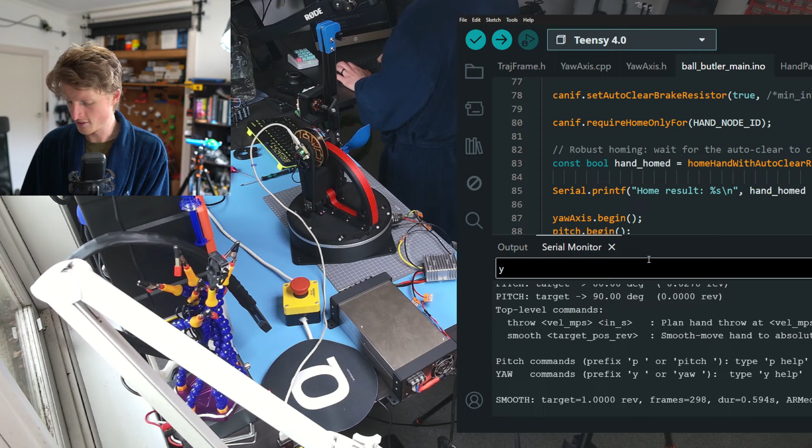Definitely the theme of the day, it works mostly. All right, so then the last axis is the throw axis. We can do some smooth moves and go to a certain position. Let me actually... you can't see this very well, so I'm gonna spin the yaw axis around. Let's go by like -100 maybe. There you go, how good's that? And let's zoom in a bit as well, because we don't need the camera so far out.

Nebby says, been a while since I've been able to watch, great to see it's accurate with the throw. That's awesome, yeah it is. It's very repeatable, except for the pitch axis taking its time to zero in. It seems to be very repeatable. Yeah, I've got a lot of stuff to say about that.

But yeah, so we can smooth move, and we can go between like the... why did that not move?

Rejected. Oh, because our limit, it's too big. It's going up to 8.

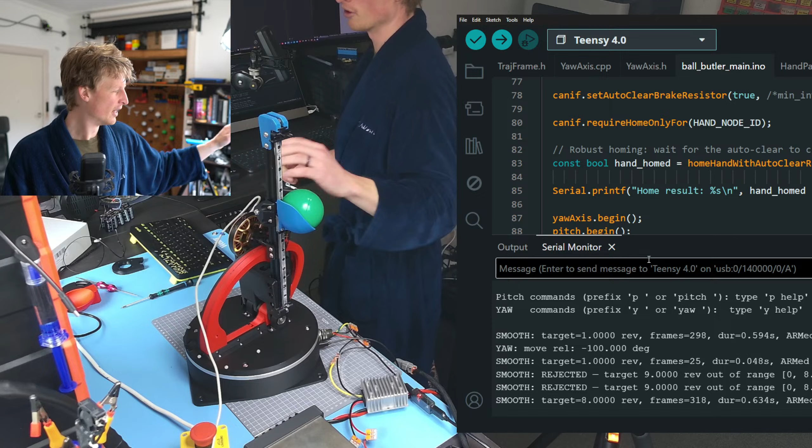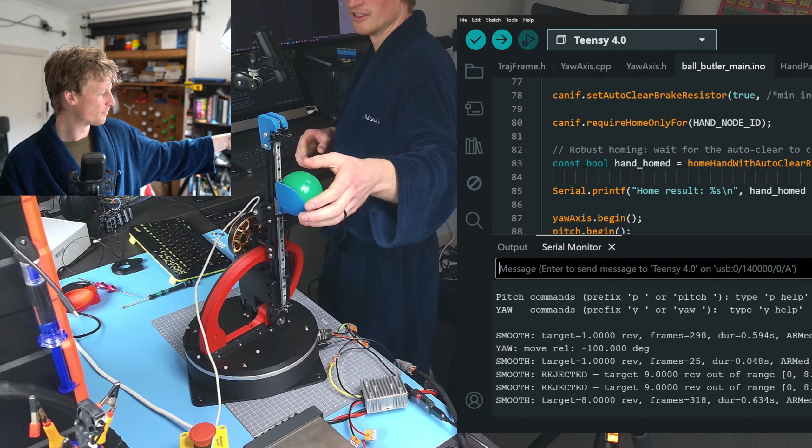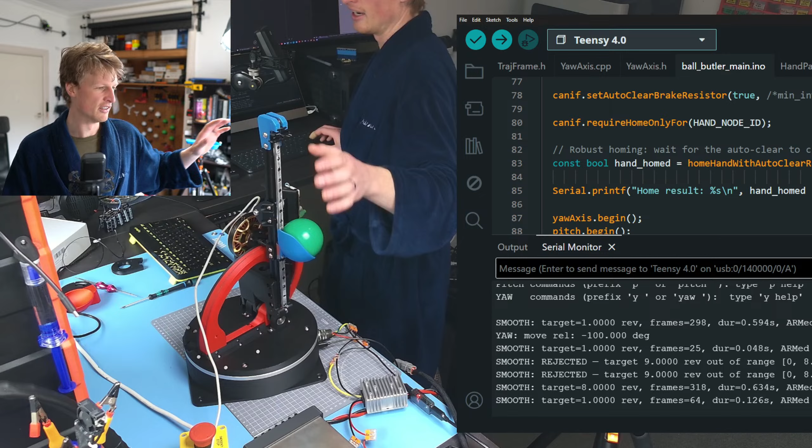Something I quite like about this, I don't know exactly why, but you may recall earlier I mentioned I'm trying to get the hand system smooth enough that I can just tap the ball and it will glide down to the bottom. I don't know if it's because we have an extra pulley in here compared to the Jugglebot system, I'll show you the CAD in a bit. I don't know if it's because of that extra pulley or what, but there is a bit more friction in here, and that works in our favor, because it means I can command the hand to move, and as soon as it's done moving, it turns itself off.

So we can do the smooth moves, and then we can also do throwing. I haven't pushed this too far, and I don't really want to...

We'll see how we go. But I can send a throw. When I send a throw, I say the speed I want to throw at. I don't know how accurate this is to reality. If I command 1 meter per second, I don't think it's actually throwing at 1 meter per second. But then the throw, yeah.

I need to do some more calibration on this as well. So I set the speed, and then the time away from right now when we want that throw to happen. So it goes down, 1 meter per second throw, not very interesting.

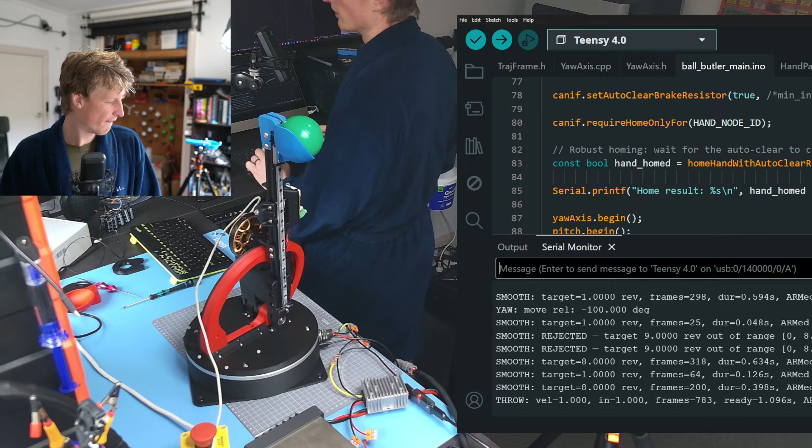Theodore asks, is the encoder output of the pitch axis also noisy? No, it's not. Short story, from what I can tell, it's not - to 2 or 3 decimal places, it's not. It's actually quite clean.

So let's go up, let's go to 2 meters per second. What? Ah, okay, 1 second is too soon. We need at least 1.245 seconds.

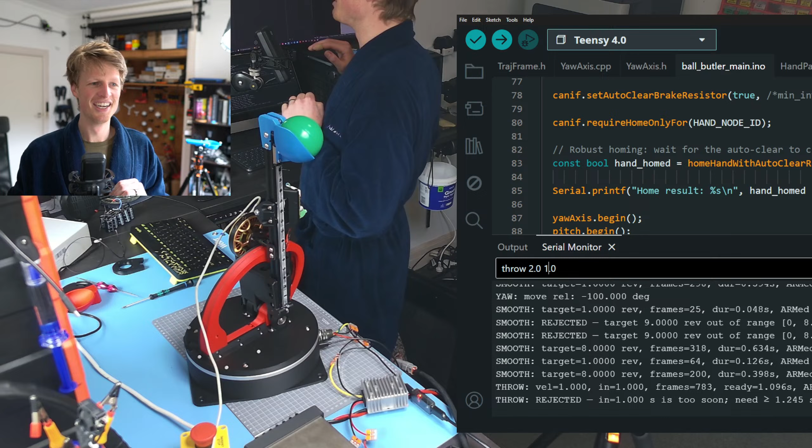Because right now I have it set up so that when it goes down, it calculates how much time it will take to move down to the very bottom in a slow manner. Then it pauses at the bottom for some amount of time, and then makes the throw. If there's not enough time - if I've commanded a throw to happen in 1 second, as I just did, but it's going to take 1.2 seconds to be fully ready by going down and waiting - then it says no, I can't do it. You need to give me more time.

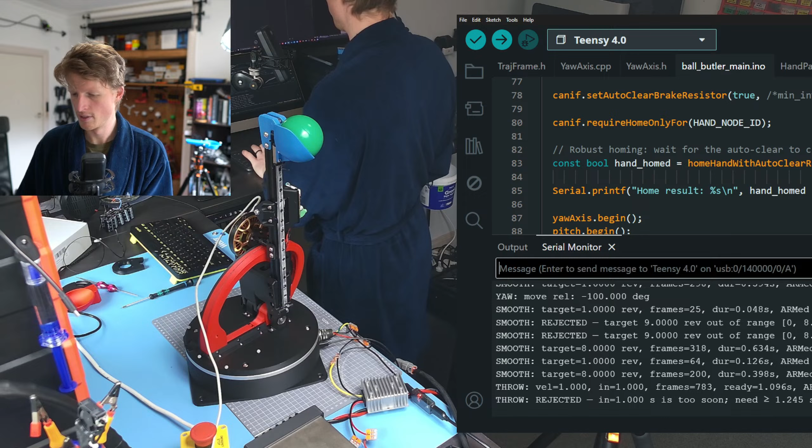So let's give it a bit more time. Now it goes down. And of course, Ball Butler is not designed to catch, so this makes the testing a little bit annoying because I have to manually catch the ball every time.

Let's go a bit faster. Let's go to 3, and let's maybe zoom out a bit.

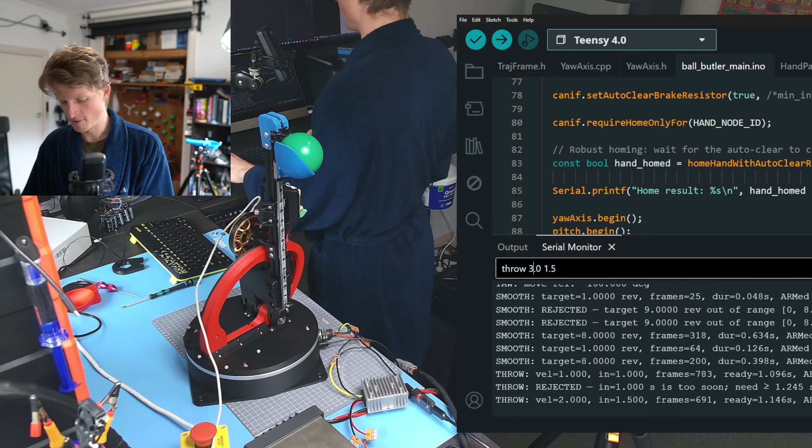Yes, James, that's a very good way to say it - it's neutrally buoyant on the linear bearing. Absolutely, yeah, it's very easy to move around. You can see it doesn't take much force, but then when you stop moving it, it just sits there. Which is kind of nice, but it also means the motor's working harder than I maybe want it to.

But also, it can do big throws. So it's 3 - that's all right, we're getting there. I don't think I've tried 4 before. So let's... that's pretty good.

I think that might have been out of frame. And of course, this is the same everything pretty much that Ball Butler is using, so it's very, very capable.

Let's try 5, and then I'm not going to push it past that, because I've definitely never gone this far before. That hit the roof, and we got an error. What was our error? This is good science, because I haven't done this before.

Alright, okay, I was going to talk about this a bit later, but maybe now is a good time. Just keep this in mind: the ODrive S1, you can't actually see that. Let me spin it around so you can get a better look.

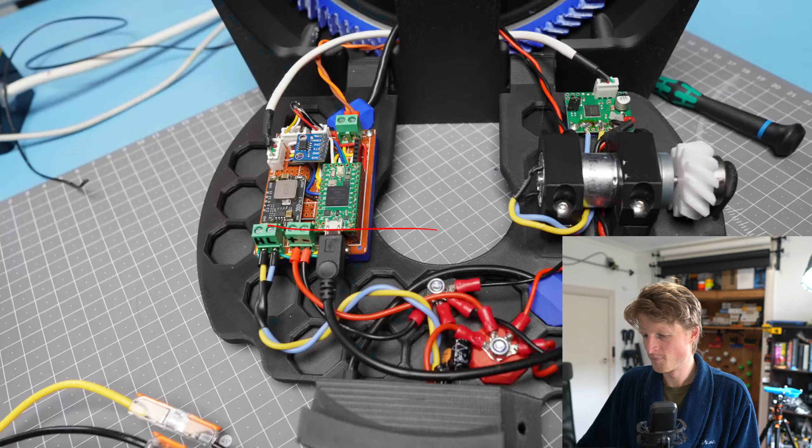I've got a collection of photos here now that I wanted to show at some point, and I didn't really have a good spot to do it, so I figured I'll just do them all at once. This is the inside of Butler, and I might show a bit later, once I know I'm done with all the demos, I can take it out and show you if we want to. It was an interesting experience getting these cables around the back here. If you don't remember this, I'll show you on the CAD.

This base, I've designed it so that it can open up so I can get access to all of these electronics fairly easily. All I need to do is unscrew a single screw in here, and then once that screw's done, I can flip this down. Of course, these connectors do come with the lid here, but because of the way I've modeled this in Onshape, it's kind of hard for me to make them move without breaking other things, so they stay there in the CAD.

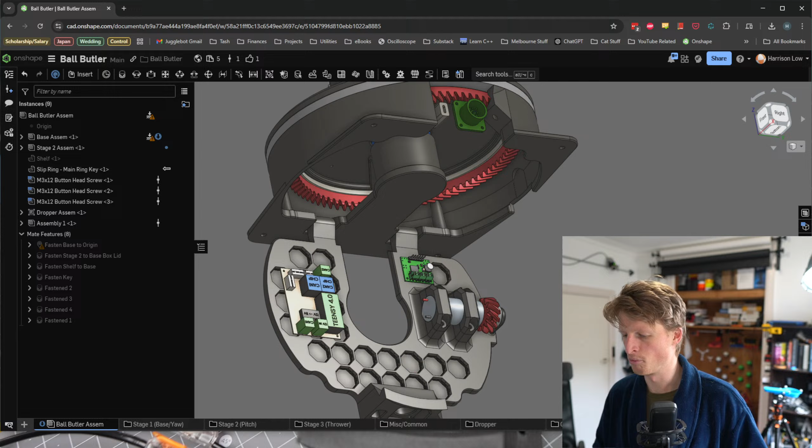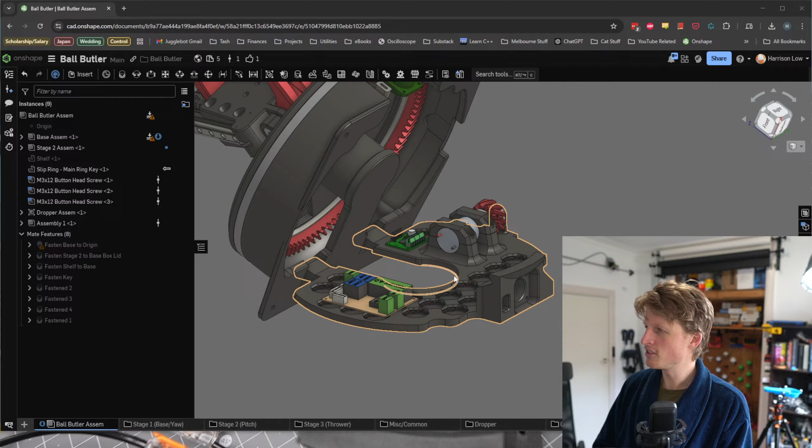There are cables that need to run from this blue guy in here, you can see that little thing here. These cables need to run out from there and then go down into the Teensy board over here. Getting those to be the right length so they didn't pinch or get pulled too tight when it's fully open was a little bit tricky, but honestly a lot of the lengths were exact.

These are the same cables that I used before. Like this white one is the exact same cable that I used in the exact same spot before, and it just happened to be the perfect length. So that was very nice, very happy with that. I don't really have too much else to say about this. Yeah, it worked just as well as I hoped it would have.

I really love this. I strongly recommend, if you are doing anything like this where you need to have electronics in a box and you don't know exactly where they're going to be placed and you want a bit of freedom with where to put things, this multi-board layout that I've done here, and you can see it a bit better in the CAD, these little tiles in here were amazing. It just makes it so easy to snap down little holding things wherever you want. Because I had the cables at certain lengths, I had to actually move where my bus bar multi-board things are, and that was just trivially easy because it's all multi-board. I can just put them wherever I want. Very, very good. Definitely recommend.

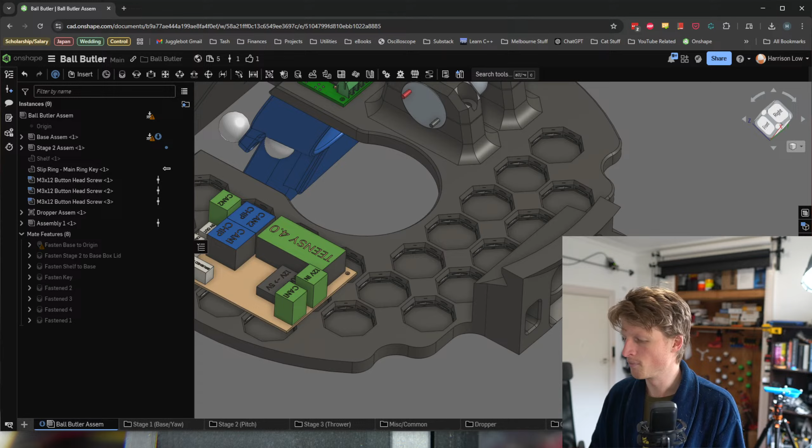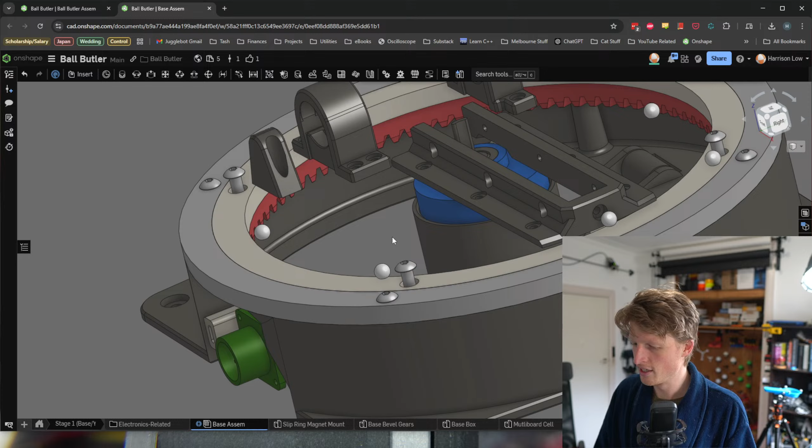That is attached with 4 screws. These 4 screws around here, they go through the lid and into the ring, into the big gear. All 4 of them go in by the same amount, which is, I think, like 7 or 8 mil, something like that, into there.

Actually, we can just measure it, let's not be lazy. Oh, no, it's not, it's 4.5 mil. Maybe this is the problem, that it's not biting in enough. Because in some spots, it's really hard to capture this on camera, but this little gap here is not there the whole way around. So I don't know.

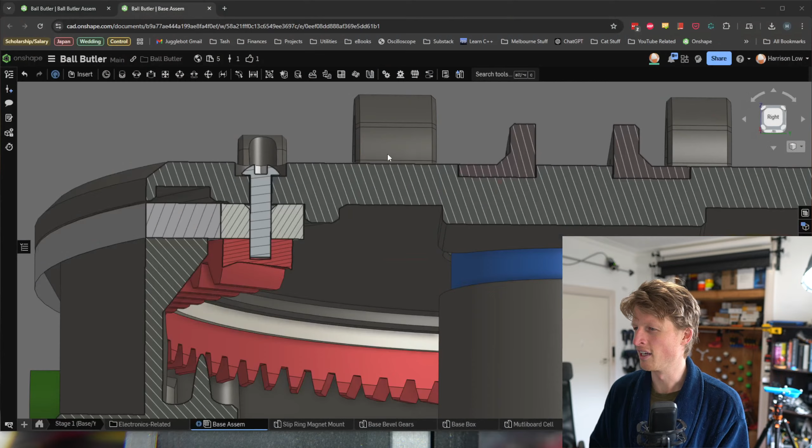I suspect what's happened here is that the print has warped ever so slightly. This is PLA, so it's not usually prone to warping, but maybe it did, or it shrunk a little bit. And because the bearing that I've screwed this into is metal and isn't going to flex at all, I think there might be some weird internal forces in the ring. I wonder if it might be better to print the ring off in multiple pieces, so that the collective shrinkage will be a bit less, or I'm not really sure.

But I have noticed that the amount of backlash present, if I manually try to move the yaw axis, in some positions I can get a little bit of wiggle out of it, but in some positions I can't move it at all. So I think there's definitely something weird going on there, but it still works. So we move on.

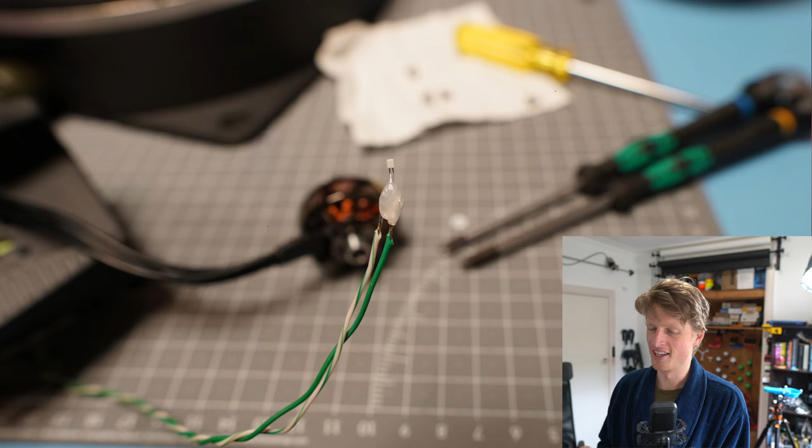I have also added a thermistor into the hand motor because I don't really want to continue burning my hand motors. They are very annoying to re-string into that position. I am aware that because I am pumping a lot of current into the hand motor, it will just be a matter of seconds before the hand motor overheats in some situations.

I think this thermistor will be a little bit too slow to respond if something goes wrong and the hand is just driven into the top and keeps trying to drive into the top, which is the sort of situation that has led to it being burnt out in the past. I don't know if the thermistor will actually be able to do very much to help with that because it's going to take so long to catch up to realize we're actually super hot right now. But it might help.

It might do something. At a minimum, once this system gets working, it's possible we could have it churn through balls pretty quickly, so we can just collect, prepare, throw, collect, prepare, throw. I know I've said in the past I'm not planning on doing this, but it's possible. And maybe it'll be good to at least be able to monitor how that gradual temperature is rising up.

So that's just shoved into the back of the motor. I have added thermal paste as well between the thermistor and the motor coils, so hopefully that should be a fairly accurate representation of the motor temperature once it catches up.

The biggest thing on the Teensy board that I've had to change is the buck converter, because now we're running everything off 24 volts instead of 12 volts. The old converter only goes up to 15 volts, so I had to swap to this one, which goes up to 30-something. It's basically doing the same job. You can see there's a little dab of solder on the 5 volt terminal there.

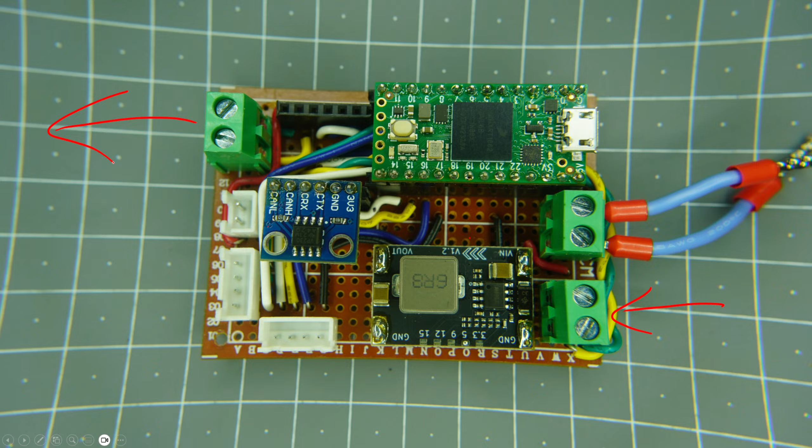Originally I was planning on having CAN coming in from Jugglebot over here, so this would be like Jugglebot CAN, and then we would have CAN coming out over here, internal into Ball Butler. But over the last couple of weeks we realized that for now at least, it's a bit cleaner and easier to just have these two CAN buses merged, so the Jugglebot CAN bus is the exact same as the Ball Butler CAN bus.

To get that to work in the easiest way possible, I just bridged CAN high and CAN low. So like over here, these two CAN high, CAN low, these guys are now just bridged between the two transceivers. That's all I had to do pretty much, and that works.

Yes, some dodgies - there are very many dodgies in this setup right now. This is in no particular order as well, just the order that I happen to remember things in.

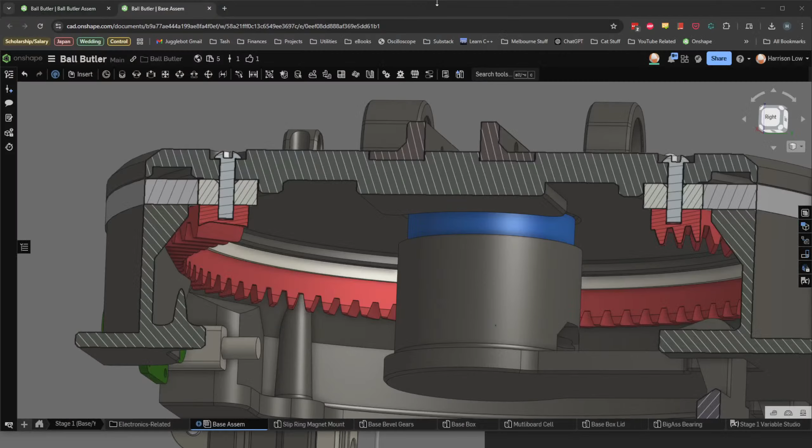The slots in the hand spool end mount, I had to change them - I'll show you in the CAD. This fucking Logitech is really shitting me, I'll probably have a rant about that a bit later.

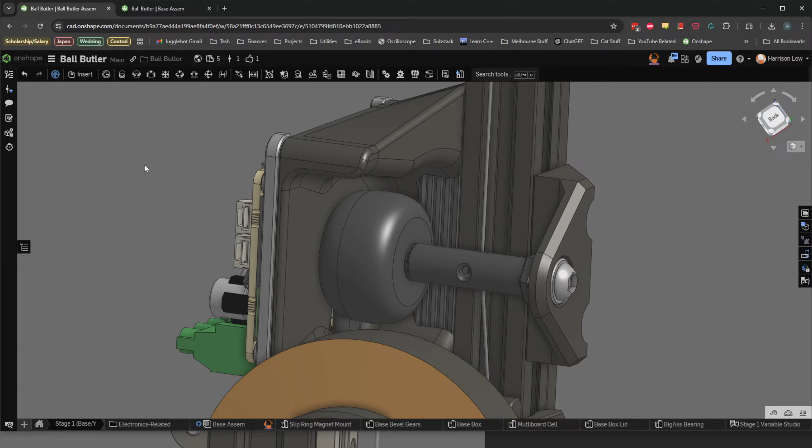So over here we have the hand motor. This is being supported on the back - we've got some screws holding it in, you can see where those 4 holes are. But so that it doesn't cantilever down, we want it supported on this other end as well. In the past when I've done this, I've just had single holes, the CAD has just been correct, essentially the TLDR. The CAD is correct and we don't need to do anything else. So I just make straight up normal holes, and then everything aligns perfectly and it's all nicely, everyone's happy. The motor doesn't have extra drag.

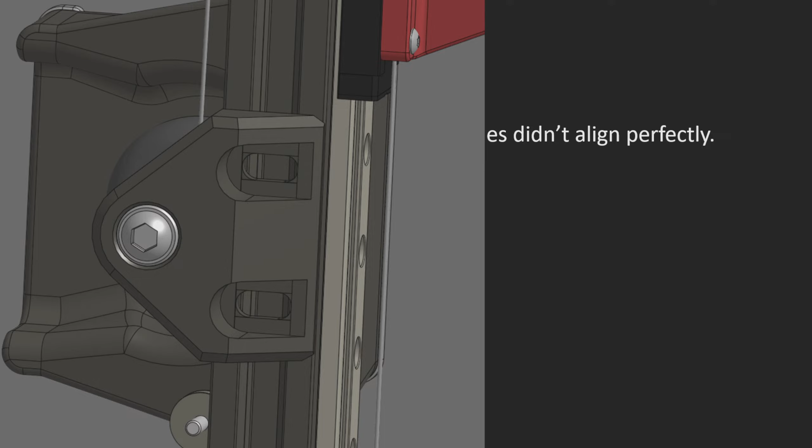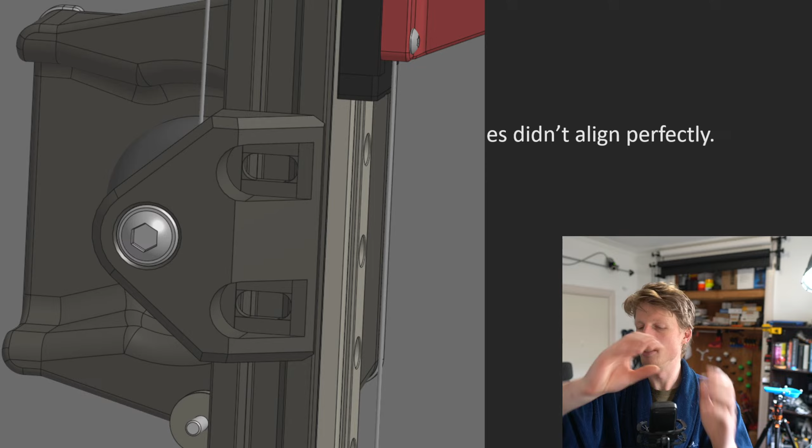But for some reason - I need to get a good video of this, I meant to before the stream, but it is what it is - the hand motor spool is not perfectly true. Basically as the hand motor spins, you can see there's a little bit of wobble in the spool. I'm a little surprised by this because the motor is obviously quite true, otherwise it wouldn't really work. The spool is one of the ones I had made from JLC PCB, one of the aluminium ones, which I actually have one more over here.

One of these guys, this is made of aluminium. I would expect that they would just do this on a lathe, trim it down, and it would be perfectly concentric. But maybe not.

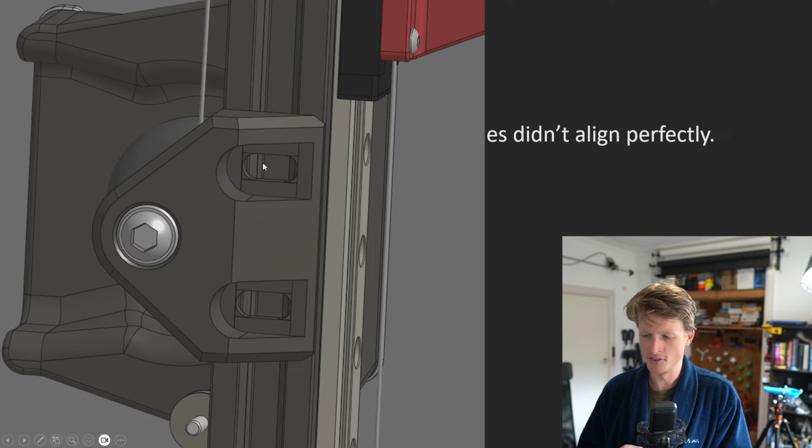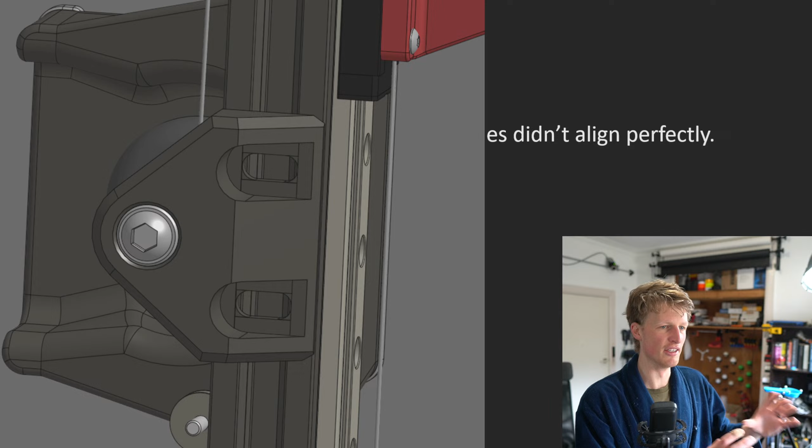So I don't really know what's going on there, but for whatever reason, when I just had the straight up holes, it was not lining up properly, so I had to change these over to slots to get everything positioned correctly. Which I guess isn't too dodgy in and of itself, but I don't love that I had to do that. Anytime the CAD is different to real life, it really makes me a bit nervous, because I'm like, what else am I not seeing that is not correct as well? I just happen to see that this one doesn't match, but what else doesn't match? It's happy days when everything is in agreement.

I also realized over the last couple of days that I don't have a fan inside Ball Butler. This nice big plastic box I've got in here—it's possible that once the yaw motor gets going really fast, that might be putting out some heat, and that heat doesn't really have anywhere to go. I also don't have any temperature sensing elements inside there, so I don't really know if I should be concerned about that or not, but it's a thing that exists. Just kind of foreshadowing in case something goes wrong in the future.

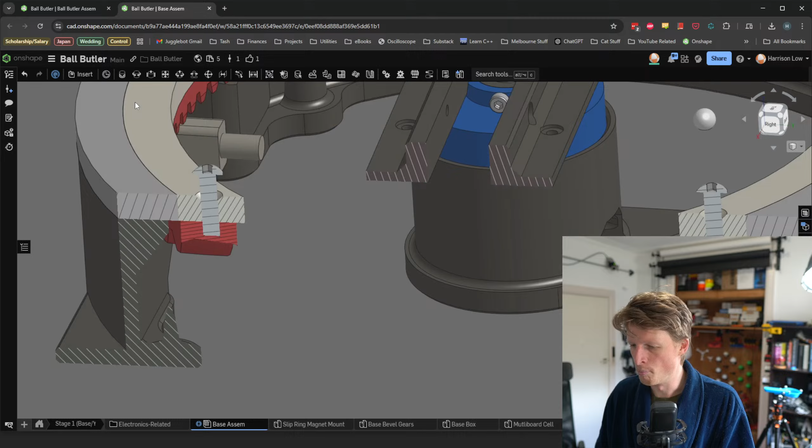Theodore says, about the yaw ring gear, bolts are not the best locating features, even more so if it needs to form its own threads. Yes, which it does. The warp could be from the bolts not allowing the plastic to sit where it wants to. It's tricky though, because I don't know what other features I can use to align them—in the bearing I only have 4 holes. That's it, just 4 holes going straight through, and those are the only things I've got.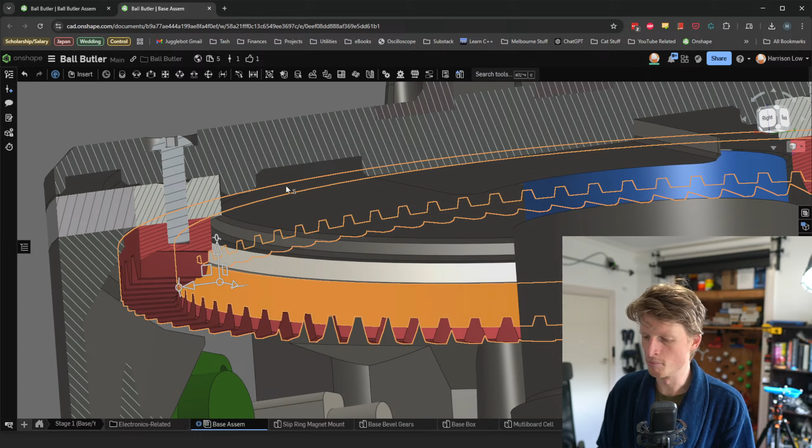And I need the ring to be beneath the bearing. I could have, if I made the ring—I actually saw recently someone made a rotating tabletop thing to take photos of stuff, and I realized what they did was basically make the ring part of the lid. So when I print the lid off, instead of this lip edge I've got, that would be the teeth for the gear. That sort of thing would work—the lid and the ring would just be one solid piece, which maybe would make the warping worse, but maybe not.

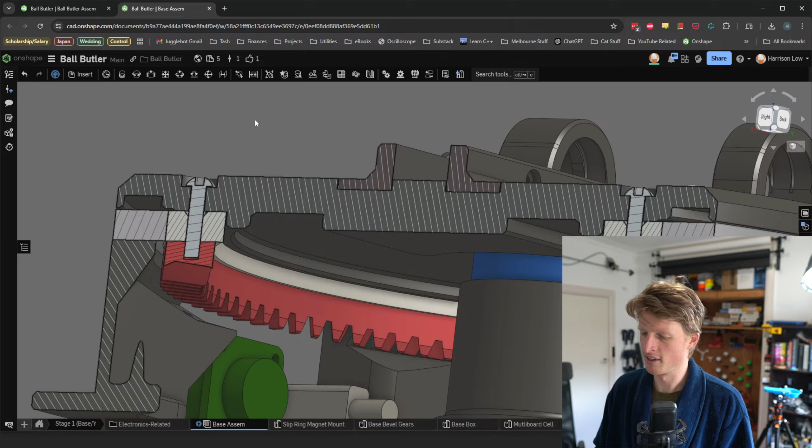It would definitely make the whole thing connected exactly how I want it to be, if I can have no warp. But I don't love that it gets rid of my gear reduction a little bit, and I've already done it this way, so it's not super easy to change. That would definitely require a lot of other things to change. But without doing that, keeping the gear in the position it's in right now, I really don't know how else to locate it. It's a bit tricky.

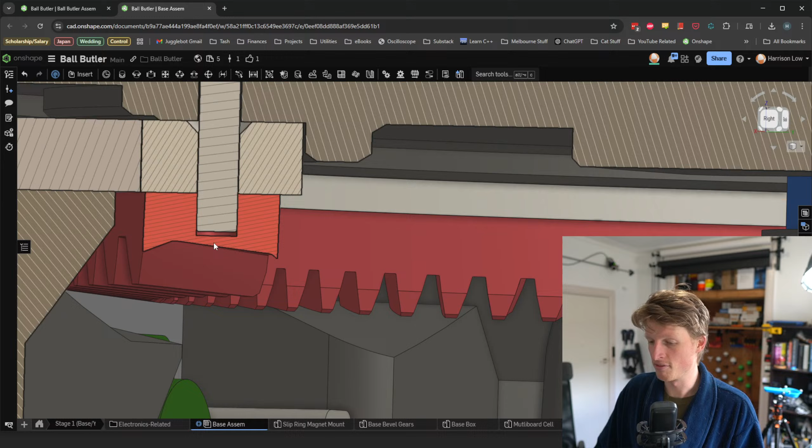Maybe I could make it a bit deeper and have the bolt bite into it a little bit more, but that would require moving the motor down a little bit, which I think would be fine. It's pretty close to the bottom there, but we can trim out a little pocket for it. Yeah, there's some options.

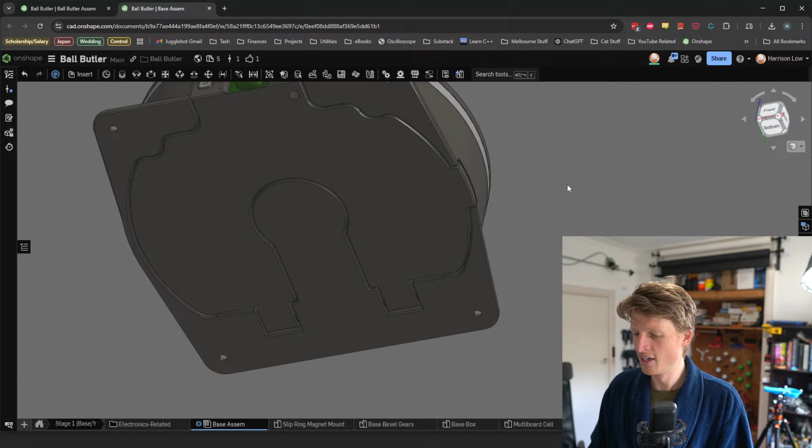And actually, this reminds me—one thing I realized when I first had this in my hands and was playing around with this hinge, which worked perfectly by the way. I meant to check last week's stream to see what I actually showed you, because I've done a lot of hours of Ball Butler work over the last week and can't exactly remember what I had done. So forgive me if I'm repeating stuff.

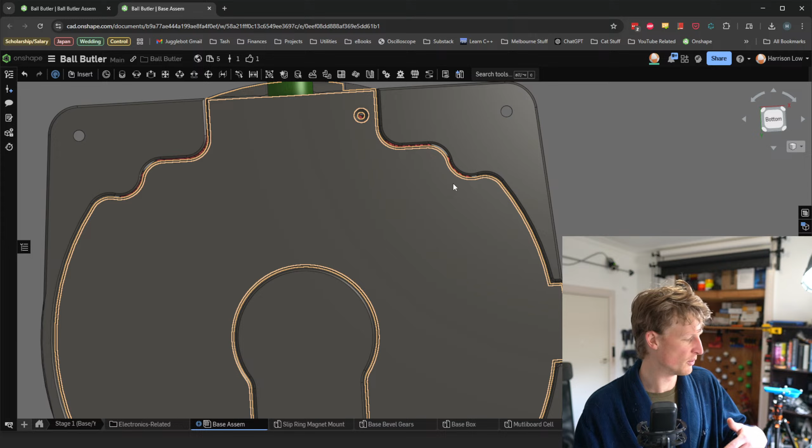But when I had this printed off, I realized that these tolerances in here are way bigger than they need to be. On the actual thing, these are full-on gaps, like big gaps. If this was on the top of Ball Butler for whatever reason, if that same situation was up there, I'd probably be a little concerned about dust getting in. Thankfully this is on the bottom, so it doesn't matter at all that those gaps are quite big.

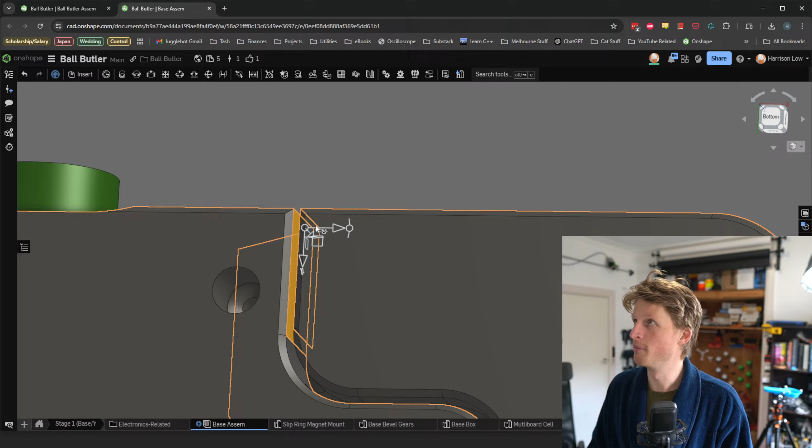But definitely if I was to do this again, I would make those tolerances a bit less. The reason I had the tolerances so big in the first place—there's a 1mm gap the whole way around—is because I really did not want to have to print this off again. Because this whole thing, this guy and this guy, are all one piece. So that was a big print.

I don't love the idea of wasting filament. But one thing that I did that was kind of stupid to do was with the support for the yaw motor over here.

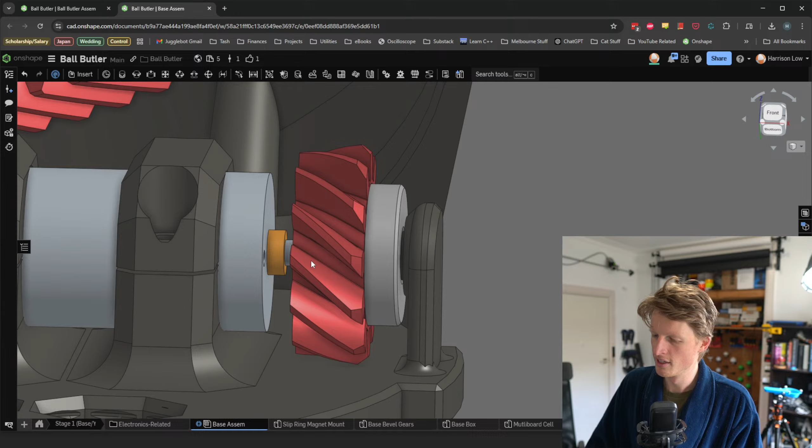I knew I wanted to have a bearing supporting this ring, because as we figured out probably like 6 weeks ago, whenever you have this kind of swept gear where the profile is curving in whichever direction, when you drive that, the gear is going to want to move along the motor shaft.

And to stop that movement from happening, this is also being held in by a grub screw. I've got a T-nut that sits in this square hole here. So a T-nut sits in here, and then a grub screw comes in, and that much more securely locks the gear onto the motor shaft.

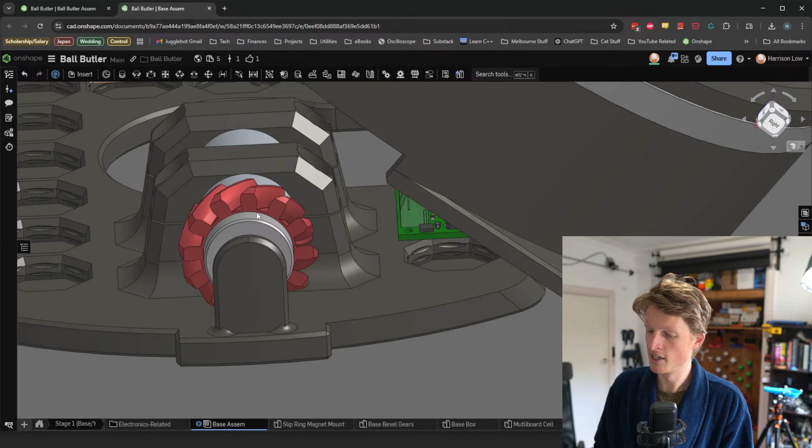However, it's possible that it'll still want to move along the motor shaft, so to stop that from happening we have this bearing in here. I knew I wanted that to be supported, so I made this little supporting thing. But for some reason I wanted it tucked away nicely inside the external box when it's closed up, so that it looks like this.

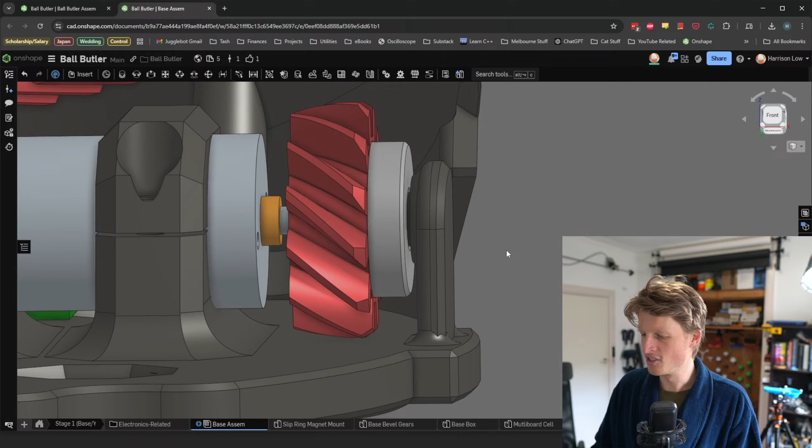But that's stupid, because that means two things happen. One is that this support is now thinner than it otherwise could be. If I extended this support all the way out to this edge, we would have an extra 3 mil of thickness on it. That's pretty significant, and it would make that a lot thicker. As it is right now, it can definitely wobble back and forth a little bit.

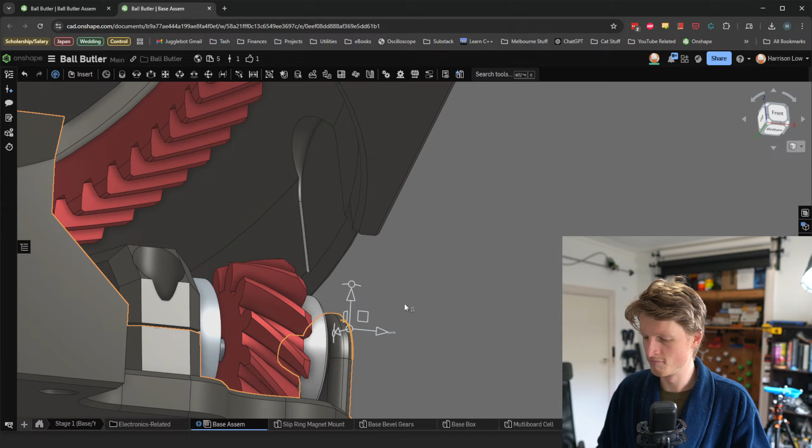The second thing is that I've had to cut out a little cavity in here to fit this feature. And what this means in practice is, because I have so much tolerance in all of this stuff, like even in the hinges, especially in the hinge, I've added quite a bit of gap just to make sure it printed perfectly fine and I didn't get stuck. So because there's so much tolerance everywhere, this whole thing can kind of shift around a little bit.

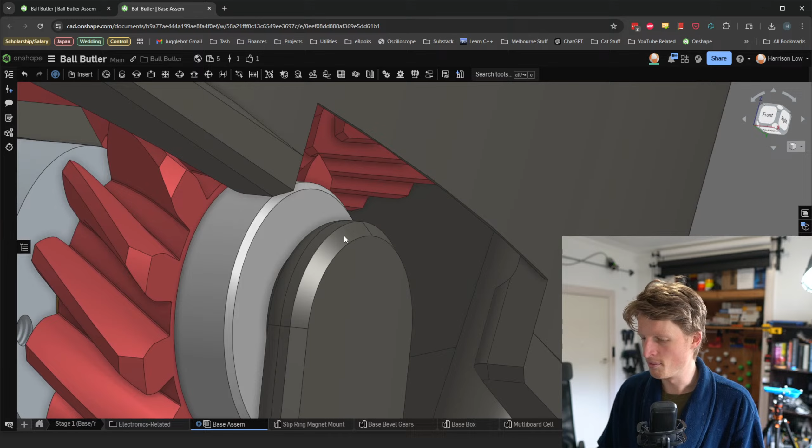And when I close the lid now, what often happens is that this edge will catch on this edge in here, and I have to manually push the whole thing over to the side a little bit to get it to close. That was stupid. I should have just made this continue the whole way out to the edge, and then had the cutout in the main box part be the same as what we have here.

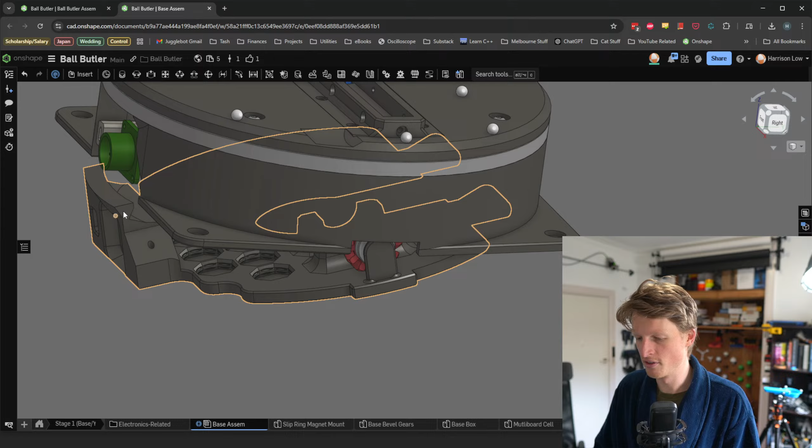Where there's like a full-on cutout and it just slots in. It's a little bit different to this one over here, because this one is on the opposite side of the hinge, so it doesn't have any risk of hitting when it's on a diagonal like this. But I should have done more or less the same thing. This was a silly choice, but it works, so.

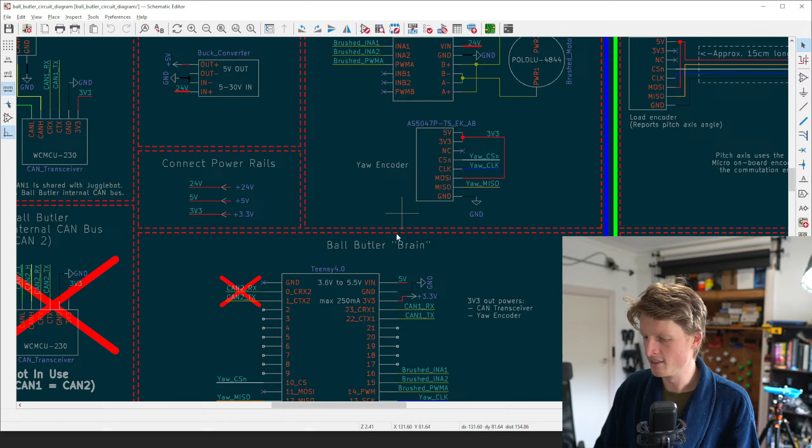All right, another dodgy thing. Now that I think about it, maybe this has something to do with why we're getting noise on the yaw encoder, maybe. But I don't know. So you may recall, I was going through my schematic, which I can show you here. Again, there's a link in the description, if you go to the GitHub repo you can find this schematic.

I was having a look through my schematic a couple weeks ago, looking at pictures I had taken of all the electronics, and I realized that according to my photos, the yaw encoder was being powered by 5 volts. This is bad, this is not good, because this yaw encoder is being fed straight into the Teensy.

So these outputs, yaw CSN, let me go on the highlighted one. Yaw CSN goes to the Teensy. Yaw clock goes to the Teensy. Yaw MISO goes to the Teensy.

Teensies are not capable of supporting a 5 volt signal on any of their pins. My understanding is that if you put 5 volts on any of the Teensy pins, that pin will break and just not be functional anymore. And at minimum, maybe other things will break as well.

So I was like, what the heck is going on here? According to my photos, this encoder is being powered by 5 volts, which I would expect would mean it would be sending out 5 volts. But somehow it worked. So I assumed maybe my photo was not up to date and I had actually just wired it to 3.3 volts. But it turns out it actually was powered by 5 volts.

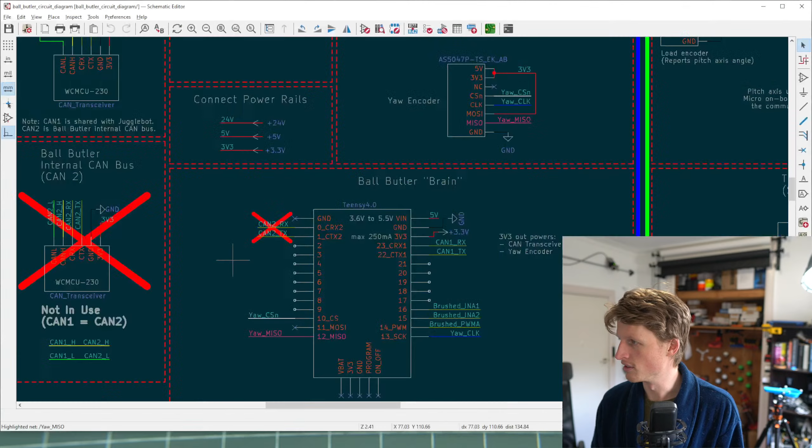I legitimately do not understand how this didn't break. The only explanation I can think of is that whoever designed this breakout board, this prototype board for the encoder, must have just figured, you know what, someone is going to mess up and power this by the wrong voltage, so let's just make it compatible. Let's make it so it's safe being powered by 5 volts, even if you set it to 3.3. Even though this diagram says you can only go up to 3.6, I guess 5 is fine. I don't really know. Definitely not advisable, but it also didn't break, so that's good.

Now we're getting into frustrating land. The ODrive S1 only initializes when it's being plugged in over USB. So I want to show you what this looks like. If I have this unplugged - the way this is supposed to work is that when the Teensy receives power, it will home the hand, gets everything ready. The pitch axis turns on and just sits there holding its position, and then everything's ready to receive commands. But I've noticed that if the ODrive S1, which is powering the hand, is not connected over USB, then it does not initialize.

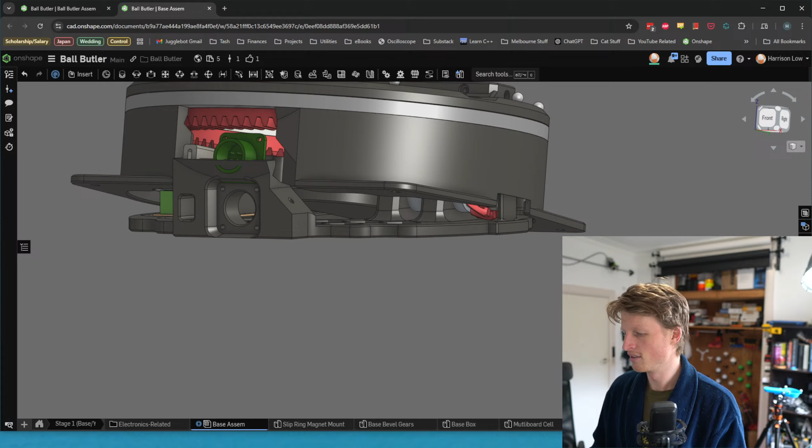I believe I have changed this now. This is on this part. Let's open this up. What is all this? Get out of here.

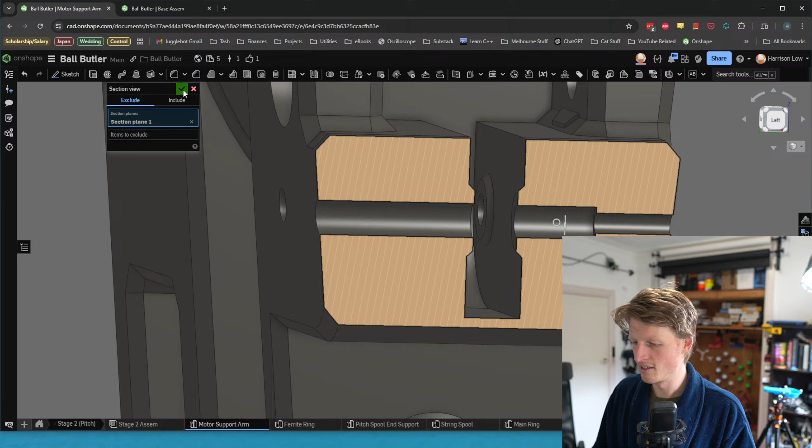So now, the proper way to do this is, in here I have dowel pins, and I've set up in the CAD a 3mm dowel pin that goes into here, and then I have a 2mm hole at the end. This way I can poke a thin thing in through this 2mm hole, and then poke the dowel pin out the other side.

In this part that I'm describing now, I didn't have this extra little hole here, and I was just like, why not try using my new ultrasonic cutter? Turns out it even cuts through metal. It has definitely damaged this, this specific blade now, the very tip of it is a bit chipped because of hitting the dowel pin.

But this dowel pin is obviously not usable anymore. So you do have to be kind of careful with where you're cutting, because you can damage stuff pretty easily. But it's such an amazing tool. I really recommend it. I'm a big fan.

All right. Now, I just want to have a bit of a rant about Brummel splicers, because these were doing me in so hard last week.

For some context as to what this is, in several places on Butler and in Jugglebot, we have strings being the main actuating force, providing the actuation. And for all of my setup in here, the way that I've been terminating all of those strings is with a loop.

So what I really want to have is exactly what this is, where, let me open it up a little bit more. We have a loop on the end, and just a nice, clean string. There's no knot in here. How good is that? So clean. However, tying this is not easy at all.

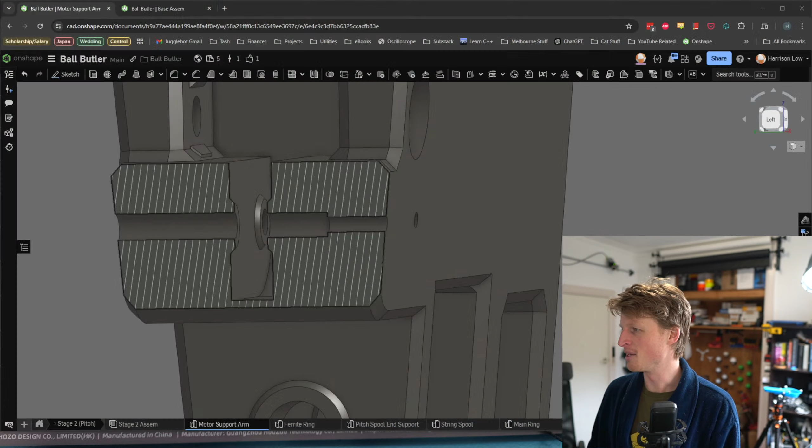Thankfully though, I was able to tie those 2 figure eights very, very close to the hand. So those 2 knots - one is here, and the other one's in the same spot just above - they are close enough to the hand that even when the hand is right at the top, the knot never interacts with the pulley.

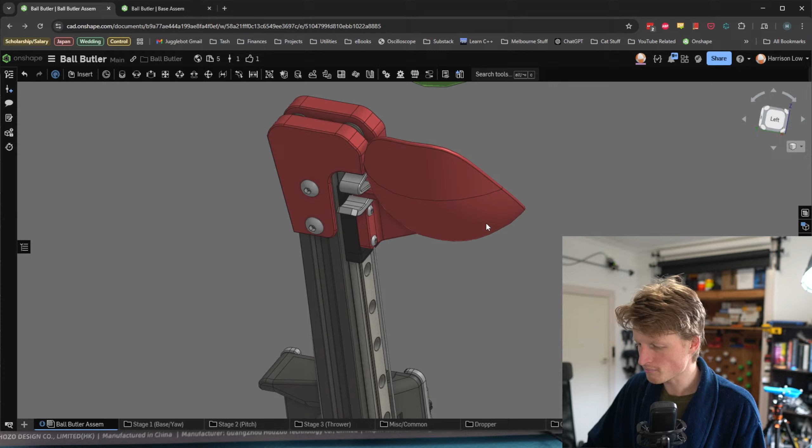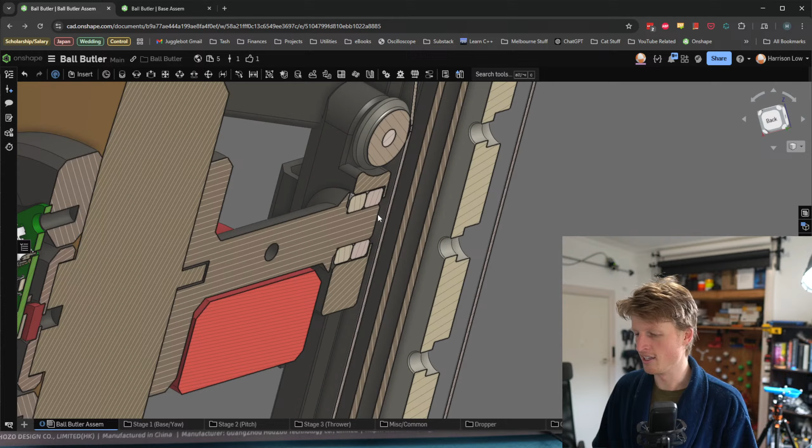While I've got the CAD open, it might be a good time to show you the way that the string is routed and how this is different to the Jugglebot's string. In Jugglebot, the string just goes nice and easy - clean up, down, and around. But here, I think I showed this off last week, because I have this support for the yaw axis, for the pitch axis in here, I've had to redirect the string a little bit so that it goes kind of inside the aluminium extrusion.

And so this is the pulley that I'm unsure about - this is the only pulley that's different between Jugglebot and Butler. And this doesn't really seem to explain to me the significantly increased friction that we have in this system compared to Jugglebot's identical system, except for this pulley.

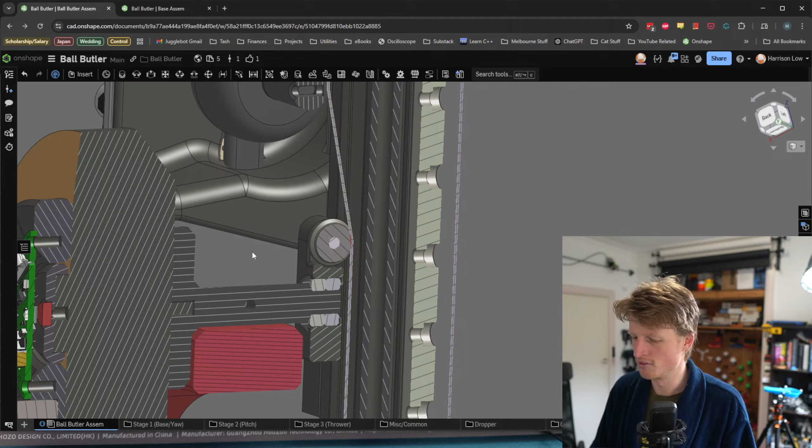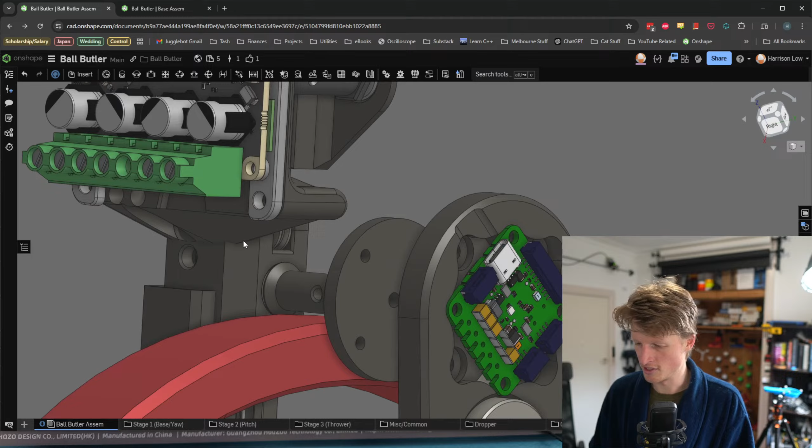One other notable thing I mentioned last week is that as the string spools and unspools along the spool, the angle this creates gets quite steep. It actually was too steep, with the hand motor being positioned exactly where it is here, which is actually inside that for some reason. That's a bit weird, I need to fix the CAD.

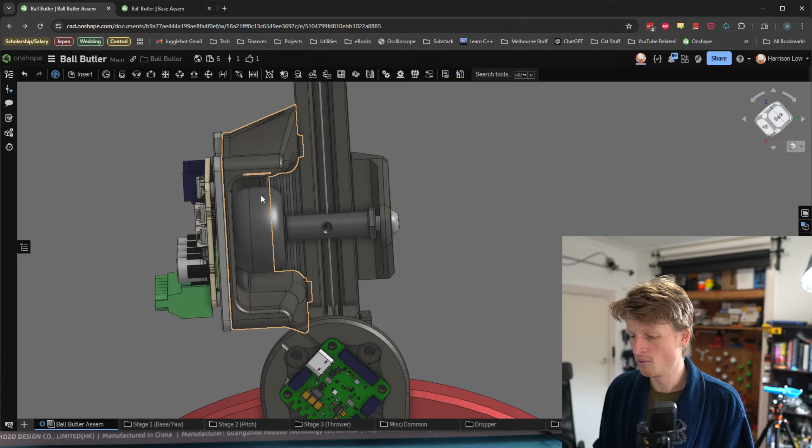With the hand being as low as it possibly could be, so that it was basically resting on this block, that angle was too steep, and as soon as I tried to move the hand back up, the string would come off of this pulley and get stuck in this side bit. Thankfully, as I mentioned last week, this is very easy to fix because all I needed to do was loosen up the bolts that attach this part and this part to the aluminium extrusion, and then slide the whole thing up a little bit. So it's now, I don't know, probably 3 centimeters above where it is in the CAD.

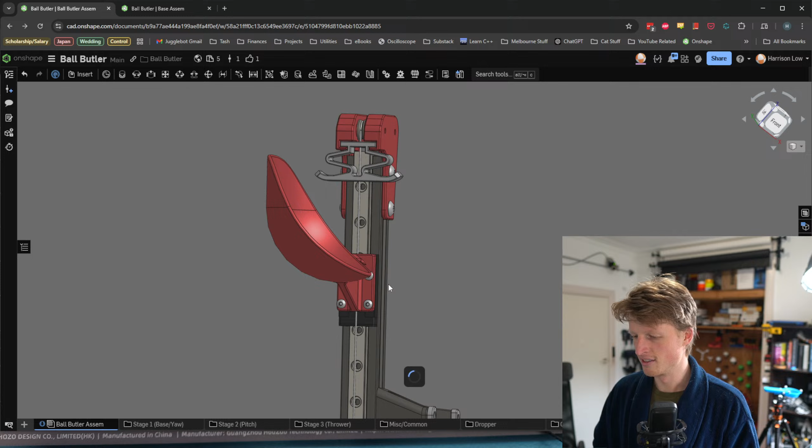You may have noticed I have two things. One is that I've added a bumper in here, and I did spend a bit of time figuring this out. This is obviously the bumper that I made - you may remember I made this bumper months ago when I was testing out some ideas, and I was holding this and thinking, okay, I know I want to add a bumper in here because why not, I may as well. This is just to stop, if the hand is going pretty enthusiastically and smashes into the end, the intention is that it will absorb a bit more of that energy than just a hard end stop would.

I spent a bit of time looking at this and thought, this can definitely be improved, because as it is right now, when I compress this down, the two points that contact each other - it feels like it's very possible to reorient this so that with the same initial height, we can get more compression out of it. I really think that's possible, but I was looking at it for maybe 5 or 10 minutes and thought, no, it works, I'm just going to keep it like this.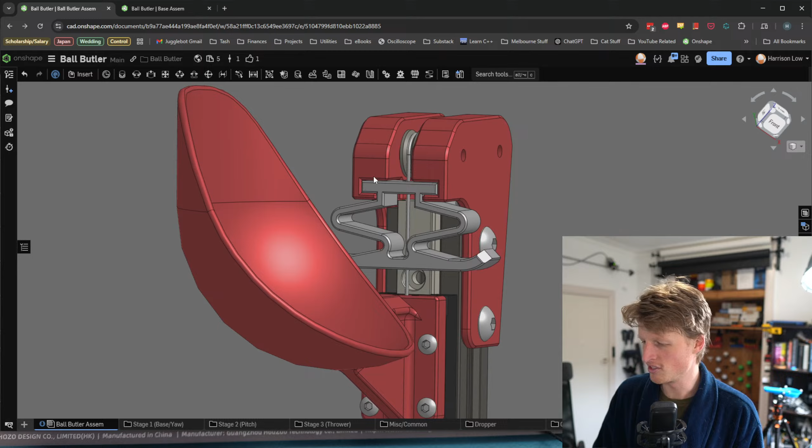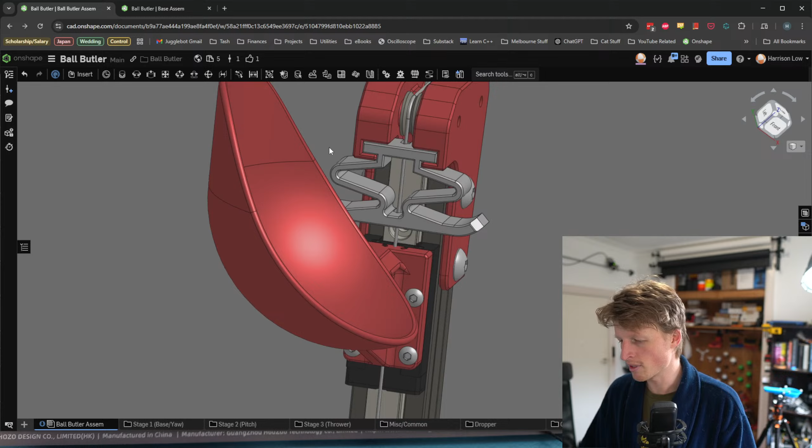So we have the same bumper as before, and that just slots in. I want to improve this so that it locks into the red part a little bit better, because as it is right now, it does have a tendency, if I continuously run the hand into that position, to slowly wiggle its way out, and I don't love that. But I really don't want to use a fastener in here, it feels like overkill. There's definitely a way to do this where it's just 3D printed, clicks in, nice and solid. But I'll keep working on that.

The other big thing here is that you can see I've got a scoop hand now, and this is shaped so that when the pitch axis is down the whole way, the ball will still stay in the hand even though we're right down the bottom. That has worked really, really nicely, actually.

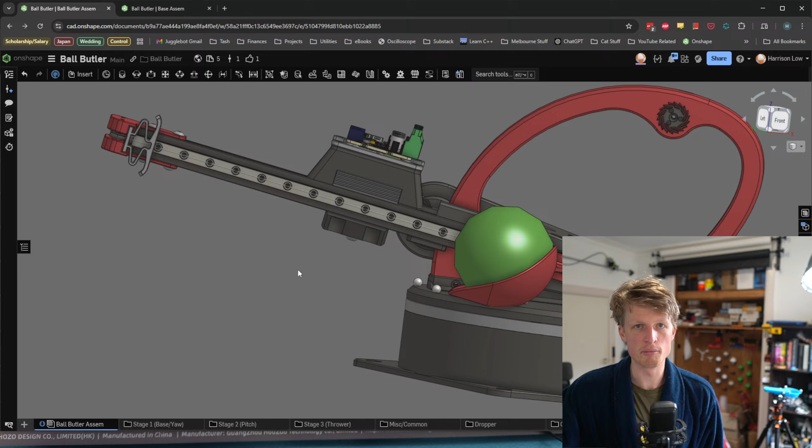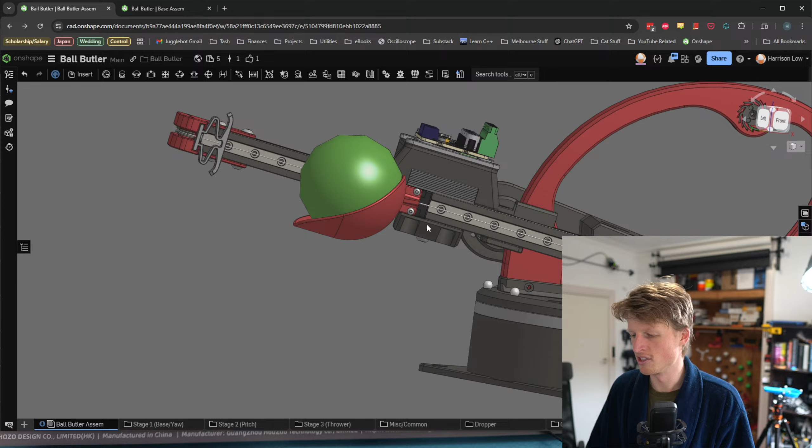I have not noticed any rolling problems, which is what I was concerned about last week when I mentioned this. I was a little bit worried that when the hand throws with a scoop like this, the ball might roll out as it leaves. But seeing it actually in operation, I realized that's not really that valid of a concern. I think the ball is just moving so quickly, and it's such a slippery surface, and the plastic is obviously very slippery, it just slides right off.

So yeah, I'm very pleased with that. I think it works very nicely, and it's a very aesthetic print - such a smooth shape.

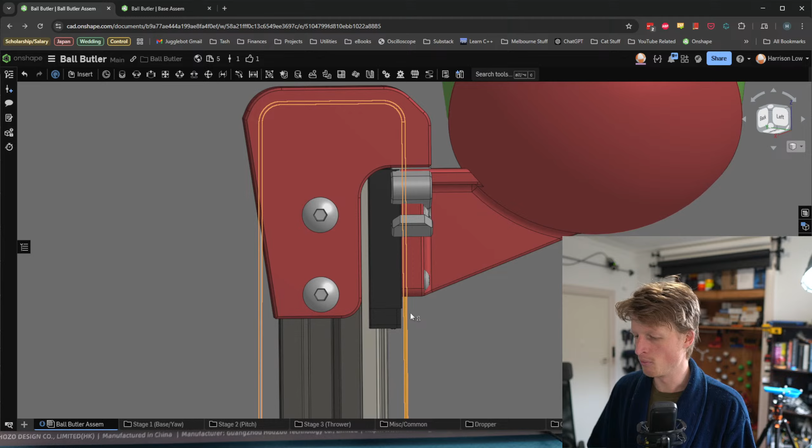All right, so back to the splices. The tricky thing with this is that this loop of string will terminate - one end terminates in the hand down the bottom in here, and the other end terminates in the hand up the top. So this is one continuous loop the whole way around. It passes through here.

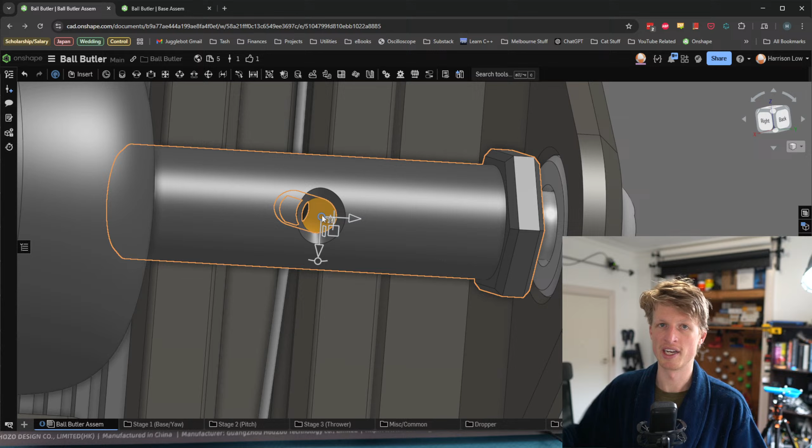I have it set up so that going through this spool now, on Jugglebot, it is actually tied on through this hole, so neither side can move, effectively making it 2 strings. But in Ball Butler, I just have it passed through this loop, so I can slide the string along if I need to. It's just one long loop, which means we need to be pretty deliberate about how long this loop is for it to fit properly.

If it's a little bit too long, we can tension the system using a bolt up the top here. I can loosen these 2 bolts and the 2 on the other side, get my hex driver in here, and unscrew this bolt. In the CAD it's all fixed together so I can't move it, but in reality I can loosen this up, and that will raise this red part up and thereby tension the string.

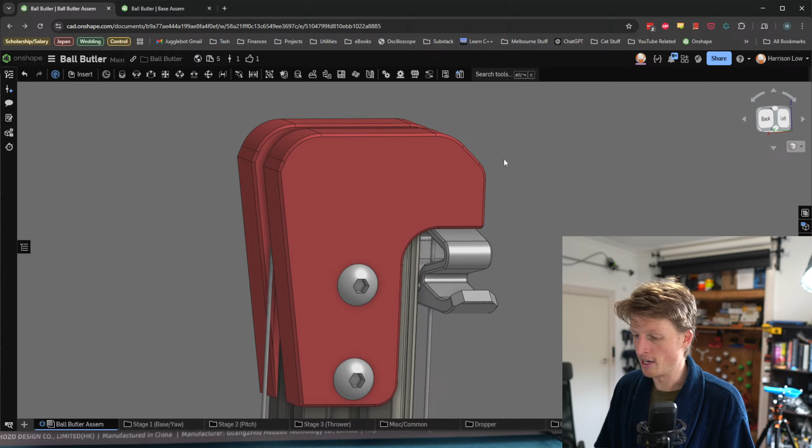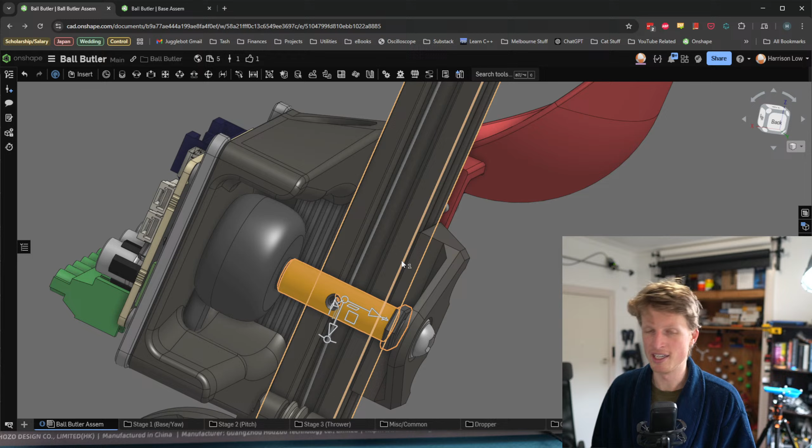That works, but there's obviously a limit to how long that can be. This bolt is only so long, and I don't want it sticking up like 20 centimeters above the top of the extrusion, because that's just going to get wobbly. So yes, there's a limit to how long we can go, and obviously if the string is too short it's just not going to reach at all. We also need at least 1 or 2 loops around the spool to make sure everything spools and unspools the way it should. So this has to be a very particular length.

This is obviously the same thing with Jugglebot, but honestly, with Jugglebot I never actually calculated how long the string was supposed to be before I tied it. I would just try it, and if it was too long, cut it down a bit and tie a knot again, then try again. Once I got a length that worked, anytime I had issues I would just copy from the same piece of string, measure using that, cut my new string, and go again. So I never really went through this calculation process, and to be honest, I'm kind of skeptical that it's worthwhile.

But you'll see why I mean that in a second. So my process for figuring out how long this needed to be - I'm very curious to see if anyone can spot where I've gone wrong, because I suspect I have.

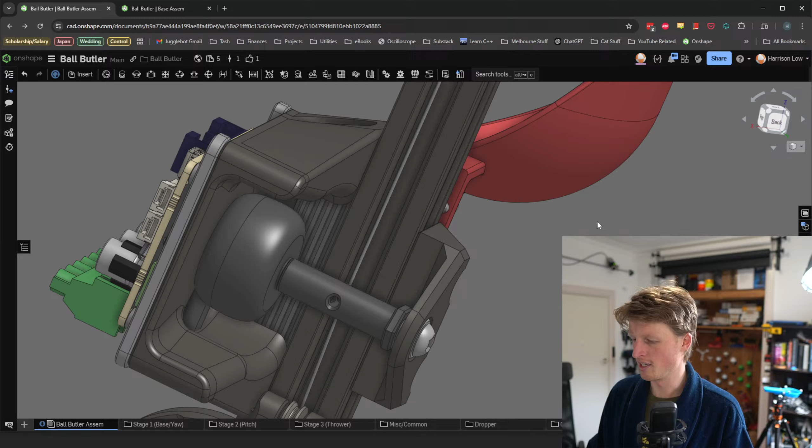The stroke is 310 millimeters - that's the amount of length the hand will cover from the very bottom up to the very top, how much we need the whole system to move by. According to the CAD, we've also measured 841. This image shows the whole string highlighted - this loop of string needs to be as long as this loop, plus the length of the stroke, plus whatever we need to tie the knots, is my general thinking.

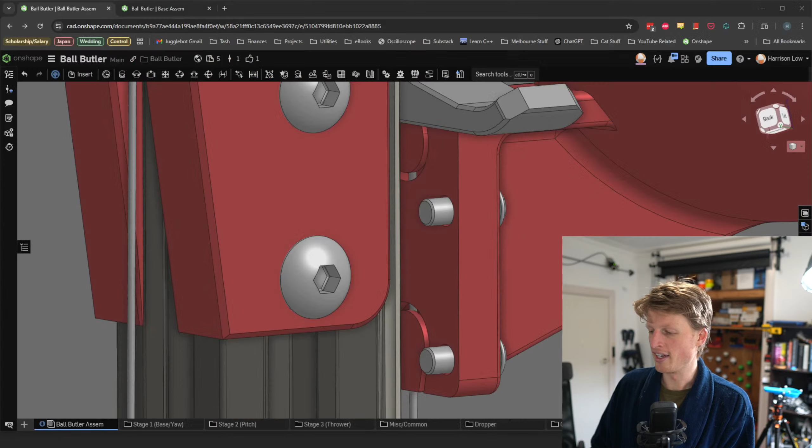So this loop is 841 millimeters, the stroke is 310 millimeters, and we have 15 millimeters of gap between the two loops - that's between where the two ends sit. So the total loop-to-loop length should be 1136 millimeters in theory. However, that's not including 1 or 2 loops around the perimeter, so maybe add 20 mils or so - say about 1150 millimeters.

We then, because I was intending on doing this with a Brummel splice - since we can position Brummel splices very deliberately - need to know how big we want the loops to be so that when we tie the Brummel it ends up where we want it to be. We have a perimeter of 30 millimeters per loop. I realized in my calculations I did not double this - it should be times 2 because there are 2 loops, but I only included the numbers for 1.

And then we want to bury 55 millimeters - that's this length in here, the stuff I'm trying to bury inside the main length of the string. That should be 55 millimeters if we want zero chance of any slippage at all. So this means the total cut length should be about 1300 millimeters.

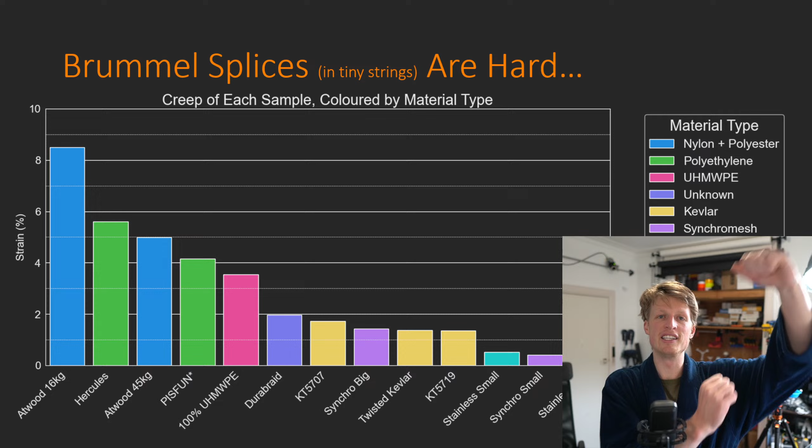But it's gone in a different order. I also know that these strings do have a tendency to creep, and I really don't want this system to need to be tuned all the time. I don't want to have to come in and re-tension the strings every little while. I'd really like to just set it and forget it. So I thought I'd pre-tension the strings, but if I'm pre-tensioning them, I need to account for that stretch that it might have before I cut them.

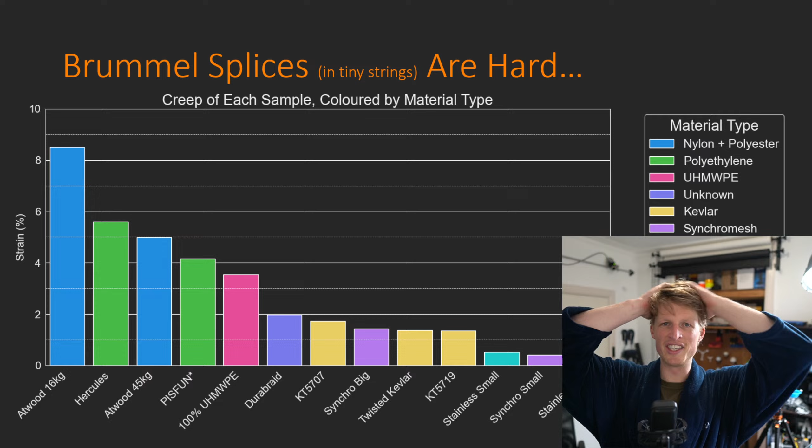I don't know if I've shown this data on YouTube at all, but one of the videos I've been planning on making for a long time is, I've even got the title, Which String is King? How good is that? Oh, I've got so many aspects of this video done, but so many not done. Video making is a lot of effort.

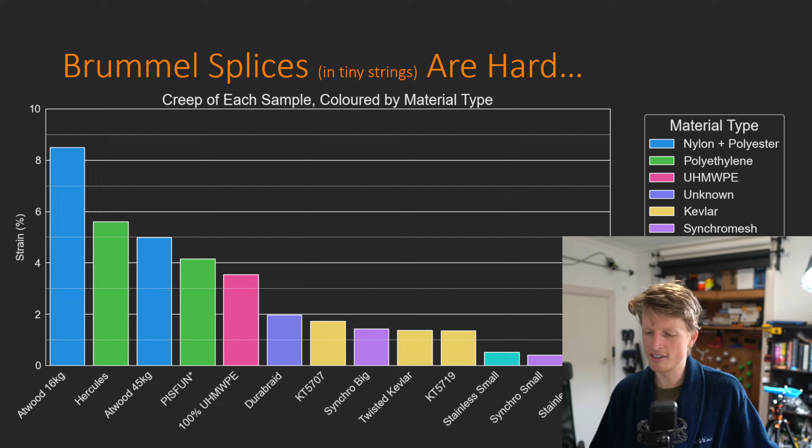Long story short, this is one of my pieces of data where I basically strung up all of these different types of string with a 5 kilo mass for, I believe, a week. And then I measured how much the string had stretched by. We can see we are using this ultra high molecular weight polyethylene, also known as Dyneema, and that has a stretch of about 3%, or 3.5% rather.

So if we include that creep amount, say about 3%, then we need to cut a little bit less, so that once I pre-stretch this, it will stretch out to be the 1300 mil that I actually want.

And I did this, and I actually have a video to show you of my setup. When I took that data that I just showed, it was a 5 kilo weight mass for a week, but I didn't have a week to wait. So what I did is I looped the string over my, what are they called, the calisthenic rings. I doubled it over, so it is only receiving half of the weight, but I put on a 35 kilo mass. And because it really doesn't feel good, this string is so thin, it really feels like it's going to snap.

Hello, Batboy. Nice to see you.

I'll do another demo at the end because I'm not going to be able to help myself. But you've got to wait for that, or you can scroll back to the start.